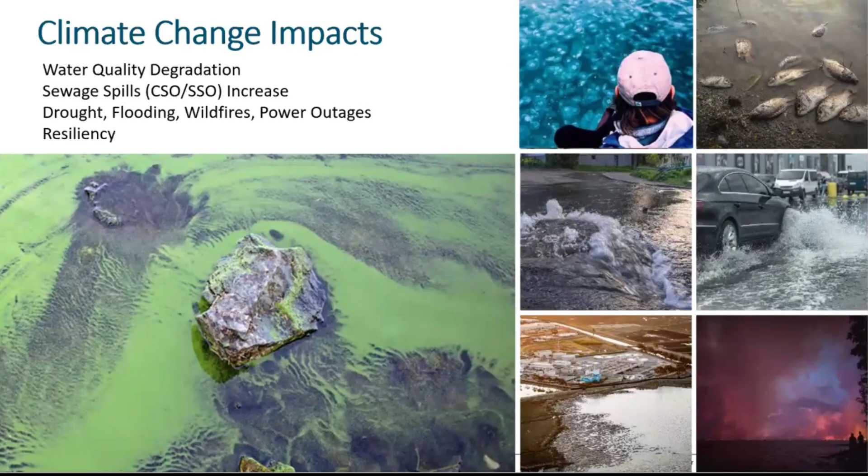And so when we think about how climate change impacts these 3Ps, we think about water temperature, algae blooms, hypoxia, kind of the technical aspects of how climate change impacts water quality for practices. For policies, we need to be mindful of balancing regulations. So CSOs, combined sewers have a harder time with higher flow treating, efficiently removing nutrient loads from wastewater. So balancing those 2 regulatory drivers.

And then thinking about advanced treatment versus greenhouse gases. So wastewater treatment plants themselves are significant producers of greenhouse gases. And as you increase the stringency of nutrient removal requirements, you're also increasing the greenhouse gases that they're producing. And so we need to consider that when really cranking down limits on wastewater treatment plants. And then finally, partnerships. So looking for cross-discipline coordination and collaboration to inform how climate change impacts nutrient management on watersheds.

We also recognize that environmental justice is an overarching challenge for the 3Ps as well. So when it comes to practices, degraded water quality typically impacts disadvantaged communities. And so we need to think about that as we're managing nutrients. Also, affordability is a big issue, right? So a lot of municipalities that have impacts on water quality can be disadvantaged communities. And so upgrading their wastewater treatment plant, putting that cost burden back on that community, we need to be mindful of that. Policies. When it comes to policies, thinking about affordability as well. And then partnerships, really focusing on community engagement and maybe aggregated funding as well.

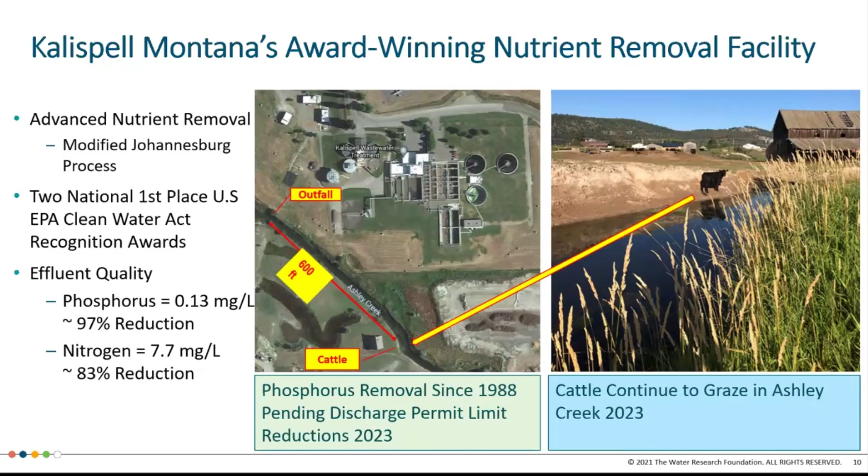And when we think about policies that drive this, we really want to think about improved nutrient permitting, nutrient reduction incentives, and pay for performance nutrient reductions. These are things, along with adaptive management, that facilitate nutrient removal in a cost efficient and sensible way, right? And then integrated planning, I want to touch on that real quick before I move on. Integrated planning is another important one too, because that speaks to how to balance competing interests with limited resources. So with integrated planning, a municipality is able to come up with a plan to prioritize what capital projects should be, the order of capital projects, and then identify funding sources to address several issues in a sustainable way.

So when we talk about partnerships, we really want to think about how do we strengthen partnerships. And in order to do this, we identified barriers to effective partnerships and then key success factors for successful partnerships, right? So if we think about barriers, you're talking about undefined roles and responsibilities. I know I'm going to get to this in a little bit. I was really involved in the Delaware Estuary Water Quality Improvement Partnership, or DEWQIP, because every project or partnership needs a really good acronym to go with it, so it's key. And there we struggled with this in our first year because we were trying to put out messages to the community, but the roles weren't well defined. So it was hard to put out a press release that said DEWQIP on the bottom, because what is DEWQIP, right? So that kind of definition is really important.

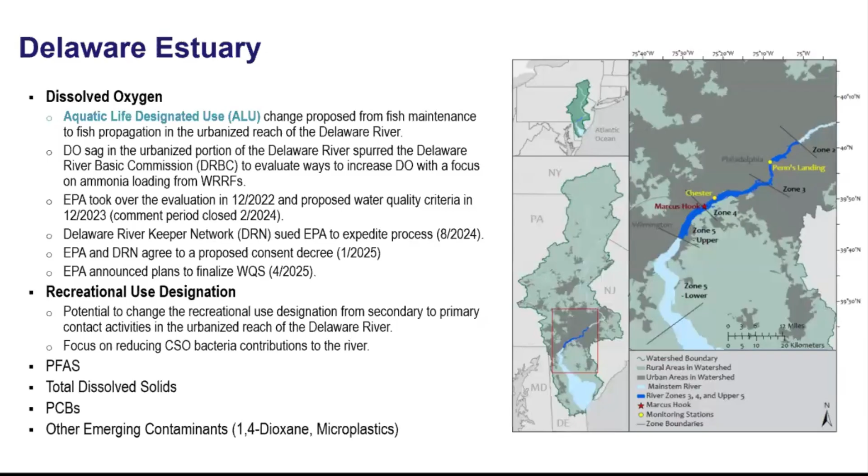There's a whole regulatory history that goes back to 2017, where DRBC started to study how to address this issue. They were going through this study, zeroing in on updated DO criteria, and one of the stakeholders in the area, the Delaware River Keeper Network, petitioned the EPA to step in and hurry the process along. The EPA did so, and then they actually were taking too long for the river keepers' liking as well. So I think they sued them as well. So kind of a little bit of a regulatory mess with some key stakeholders in the area. But what it's led to is now they have finalized the DO criteria and are moving into implementation planning with the Delaware River Basin Commission.

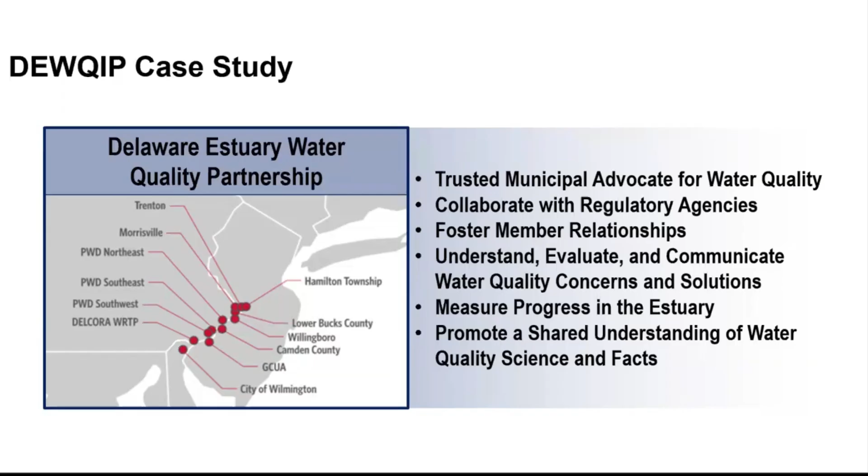The DEWQIP, or the Delaware Estuary Water Quality Improvement Partnership, was formed in, I believe it was 2021, and is a group of 12 dischargers, or nine that are active, sorry. It's 12 facilities, but PWD has 3 of those. And these are their stated goals, really. They want to be the trusted municipal advocate for water quality in the region. They want to collaborate with regulatory agencies, foster member relationships, understand, evaluate and communicate the water quality concerns, measure progress in the estuary, and promote a shared understanding of water quality science and facts. So that last one is a big key. There's a lot of discussion and disagreement about some of the science and facts that are driving this regulatory activity in the region.

Policies, there has been a long history of improved DO in the Delaware Estuary. And so that's a positive. A negative is EPA stepping in to speed things up and interrupting that DRBC transparent process that was going on. And then partnerships, again, long history of partnerships in the region; there's a PCB coalition, and before DEWQIP, there was a DO partnership with several utilities. DEWQIP formed with 9 active utilities to share information and resources, still getting their feet under them at this point. And then a plus minus here, DRBC's water quality advisory committee meetings were included in the initial effort to update the DO criteria standard. However, that process was interrupted and they haven't been having those meetings as regularly anymore. So they've kind of cut out the stakeholders a little bit.

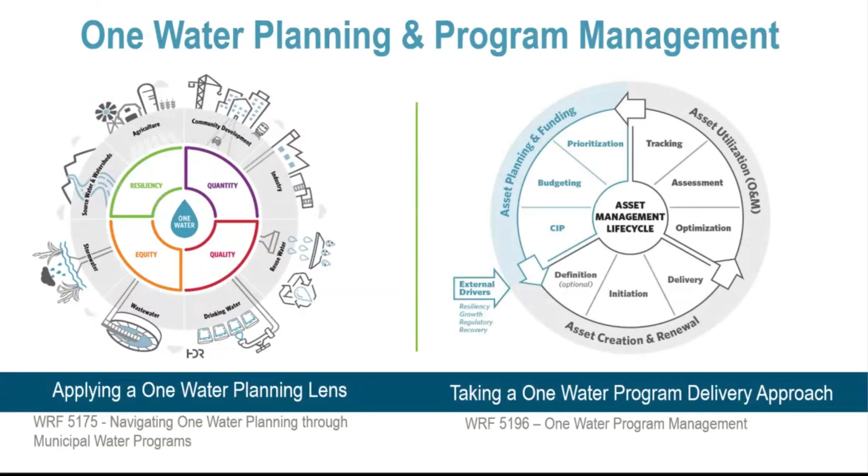This is my last slide. Just a plug that we're also doing a similar project, thinking about these 3 Ps and a framework for One Water planning and program management, and that's WRF 5175, and then also WRF 5196.

And with that, I'll take questions. I did it on time. Okay. Answered all the questions. If you think of questions later, you can go look at the report and Control F your question. The long report.

Yeah. So, in practice, most of the talk was on ammonia removal. Is there any consideration of ammonia recovery? Perhaps, but I heard there are a couple of research efforts now that focus on ammonia recovery and then recover ammonium sulfate as fertilizer. Perhaps that could offset some of the costs. Cost is usually one of those considerations. So is recovery part of the talk, or is the focus just removal? Repeat the question.

Yes. Sorry. So if I understand the question correctly, you're saying, for practices, do we consider things outside of mainstream treatment like ammonia and phosphorus recovery and side stream? Is that correct? Yeah, it's a really good point. And yes, that is part of the larger project and practices. I know there's been a lot of facilities going to ammonia and phosphorus capture. I know some facilities are having an issue finding markets for the phosphorus that they recover, which is kind of unfortunate. But hopefully that market materializes a little bit more in the future.

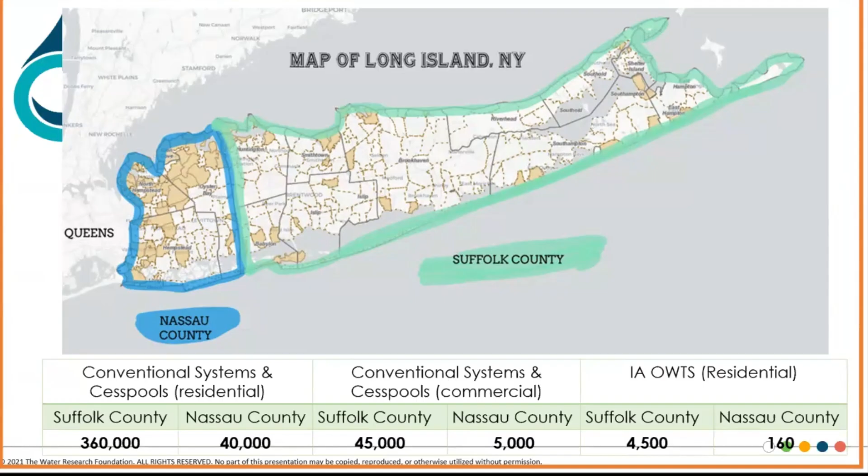40,000 septic systems in Nassau County. Nassau County is mostly sewer. However, the North Shore, contributing to Long Island Sound in Nassau County, has 40,000 septic systems. So the 10% that's unsewered is 90% unsewered. So just some numbers for you. Commercial systems, there's 40,000, 45,000 in Suffolk County. So that throws the whole number in Suffolk County over 400,000. Figure another 5,000 in Nassau County. So we're talking 450, maybe 500,000 systems that had no wastewater treatment for decades.

Throw on top of that, most people, when you think of a septic system, it's a septic tank. Most people don't think about septic systems, but I'm in a room of environmentalists, so hopefully some of you do. Septic tank, then some sort of leaching structure, typically a leaching field, right? It's a field. You're not just dumping water into the ground, except for on Long Island. They have permission from the state way back when to have these deep leaching structures, minimum of 12 foot. So these are concrete rings. They're 8 foot in diameter, 4 feet deep. They stack them on top of each other. You need 12 feet.

Historically, raw sewage goes in there and the water builds up. And what happens when you get a lot of pressure of 8 foot diameter of 12 foot of wastewater? That weight of the water, it becomes like a needle. You're creating injection wells of, I'll be nice, wastewater into the ground, into the sand, into your aquifer, your sole source aquifer, your drinking water, right? So now the cost of contaminating the water, you now have to treat it, and you're running into problems.

And guess what? There's stuff in our wastewater that we can't treat really easily. There's stuff that we didn't have in the last 10 years. There's stuff we can measure now that we didn't have the ability to cheaply measure 10 years ago. And that's probably some of the conversations going on in the other group over there. So, with PFAS and all of those other contaminants, there's pharmaceuticals. We're just measuring pharmaceuticals now.

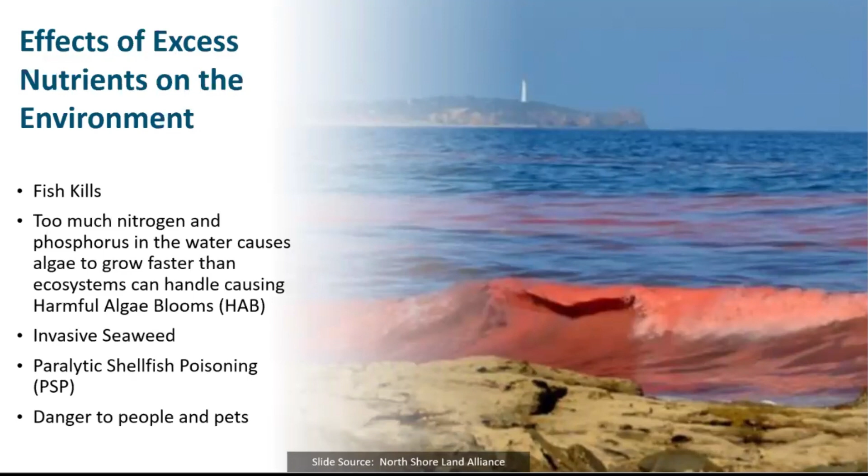If you remember a few years ago, a dog died drinking water in Central Park from a blue-green algal bloom. That got a ton of press. On Long Island, a lot of you have brown tide on the South Shore. It looks like you're fishing in a bay of coffee, right? What really gets noticed in the press is when they have the turtle die off or fish kills. But fishing in brown water, it's disgusting. You'd think people would act. And we did eventually.

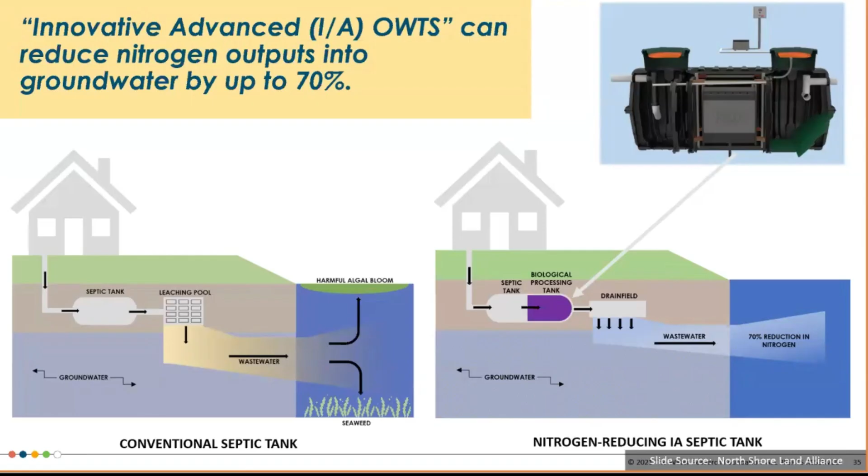So you're adding nitrogen into your sole source aquifer, increasing nitrogen in your drinking water, on top of all the nitrogen in the wastewater making its way out to your bays and surface water. So there are many environmental issues here. Over the last 10 years, we've taken a 5-pronged approach. This was set into motion when the county executive at the time assembled a team for what they called their magical septic tour. They went to 5 states in 4 days, Massachusetts, Rhode Island, Delaware, Maryland, somewhere else, and came up with a lot of recommendations.

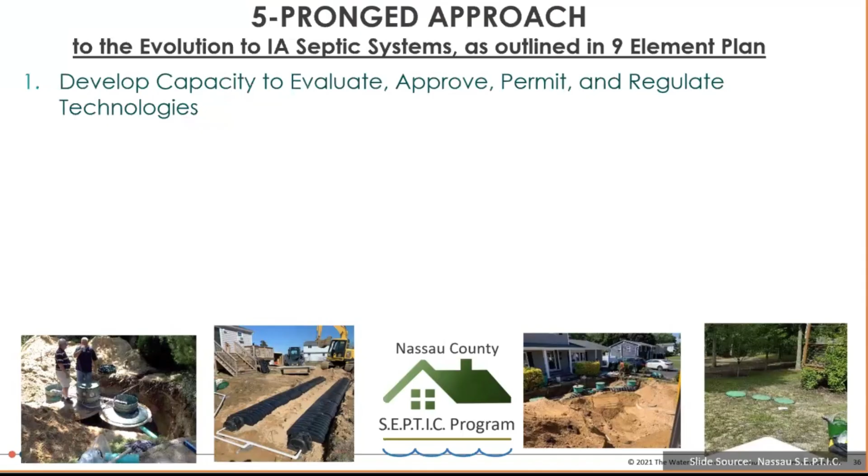They wanted to improve on what other areas that have tackled this problem have done, and how we can make it better. So we need to develop the capacity to evaluate, approve, and regulate these technologies. This is a foreign technology for the regulators, so you had to address that. Then you had to train everybody: the industry, the public, public outreach. You have to train the regulators who will be evaluating these plans. They don't know what they're looking at.

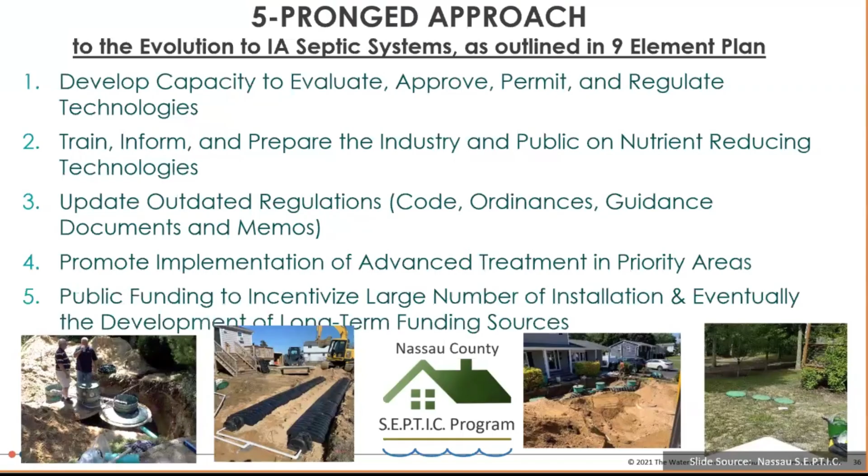So just taking a quick look, regulatory jurisdiction in New York for advanced treatment. So if you have advanced treatment systems, New York State likes to see you have a program that obviously defines your goals and responsibilities, but really addresses these systems as a don't just bury and forget about, right? You need to maintain them. They need active maintenance contracts. They need some sort of responsible management entity or RME.

So Suffolk County and Nassau County are acting as the responsible management entity. It allows them to require maintenance contracts. They added clauses in there that have renewals and reporting, and to make sure the systems are working, they put all that stuff in place. But really, Suffolk County is easier. The county has the full

jurisdiction of overall permits, whereas in Nassau County the Department of Health only has jurisdiction over new developments or subdivisions of 5 lots or more. Everything else goes to the individual towns and villages. There are 40 individual towns and villages. So each town and village could have their own set of regulations and rules. How do you make something happen?

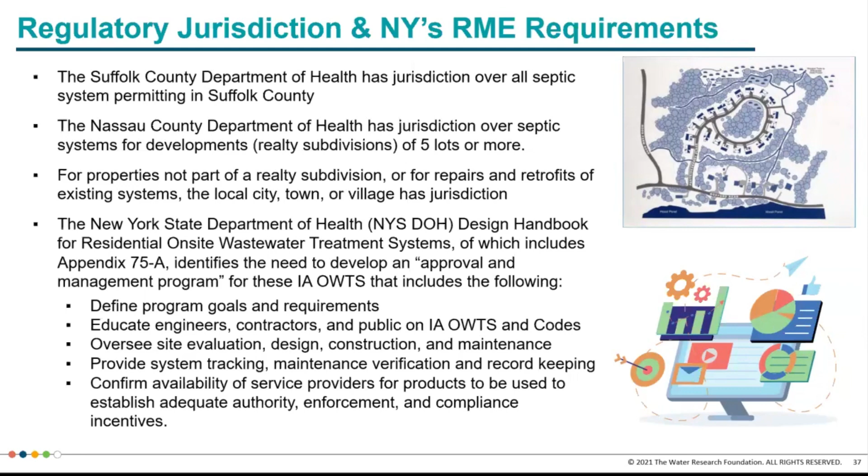Well, we teamed up with the Soil and Water Conservation District, similar to other areas and what you'll hear about next. And working with them, they acted as the RME on behalf of the county. And they gave general guidelines. Towns could do what they want with it, but guess what? The DEC gave them money, the county gave them money, they're giving homeowners money to put in the systems, and it worked.

So looking at, there's various technologies. When we started this system, we wanted to look at all the various technologies. We looked at 16 different technologies, 6 made it. 6 were actually performing to the level of nitrogen that we needed, which is 19 milligrams per liter, is what we need to meet the nitrogen reduction goals.

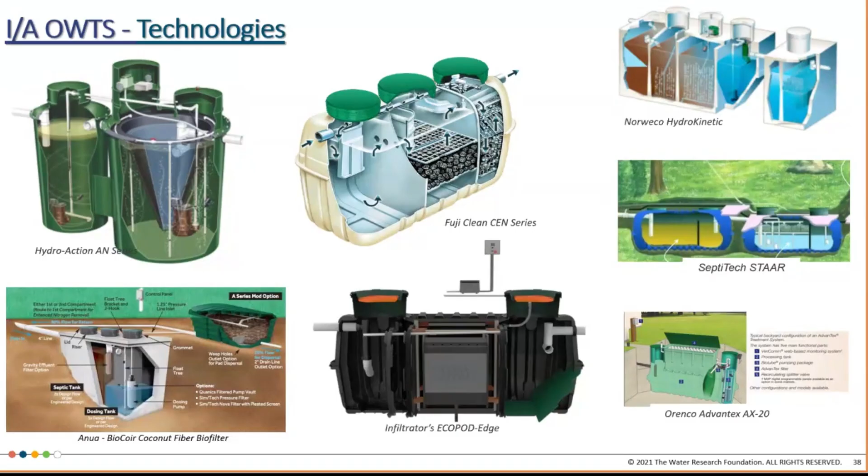The county set out and said, we want to see these in a lifetime. We want to see measurable goals, measurable reductions in our lifetime. So 20 years, we need to see something. In order to do that, we need to treat to at least 19 milligrams per liter, which is approximately a 70% reduction in total nitrogen from conventional wastewater systems. So here's a snapshot of some of the technologies. I'm not going to bore you with this. As you can probably tell, I could talk for like days on each of these technologies.

All right, so another prong in that 5-pronged approach. You got to get the word out there. You have to talk to homeowners. You have to talk to the industry, have training. We implemented continuing education for the service providers, a lot of public education sessions. And again, thanks to TNC, North Shore Land Alliance, we have maps on where the priority areas are. If you were to focus in those areas, you can measure the impact.

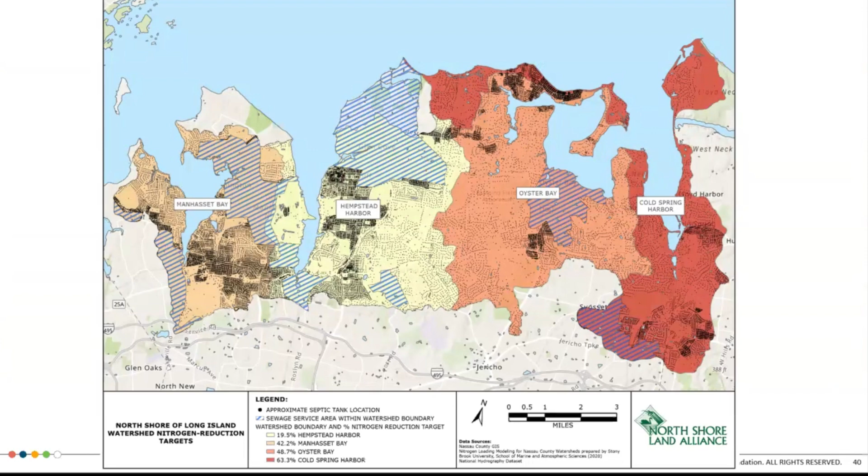So a lot of these, it shows that in the dark red 60% of the nitrogen concentration is due to septic systems. So again, I have a slide here that just reiterates the previous slide, but all of the plans that were put into effect can be leveraged. They're all consistent with the 9 elements plan, EPA's 9 elements plan. A lot of counties are working on that. They're also consistent with the Long Island Nitrogen Action Plan, which is now the Long Island Watershed Program. So by having all of these, you can leverage.

So Nassau County in general has $14 million of the required 40 million. They recently received another, I think, 5 million on top of that. Suffolk County has received over $100 million. So lots of money out there, and by having it in a plan and carrying out your plan, you can leverage federal and state funds. At an earlier discussion, I think it was in the first session, someone had mentioned they received $2 million, and that's great. It's a lot of money, but it's not a lot of money. They were able to leverage that $2 million into like $90 million. So if you can get the money going, you can leverage the money into other opportunities.

So again, there's a lot of money on Long Island and Suffolk County. Homeowners are getting up to $45,000 to replace their system. The money is not paid directly to the homeowner. The money is paid to the contractor on behalf of the homeowner. So there's this little loophole. There's also a political thing where the IRS was trying to tax the money, even though it was paid for, most of it, through sales tax revenue.

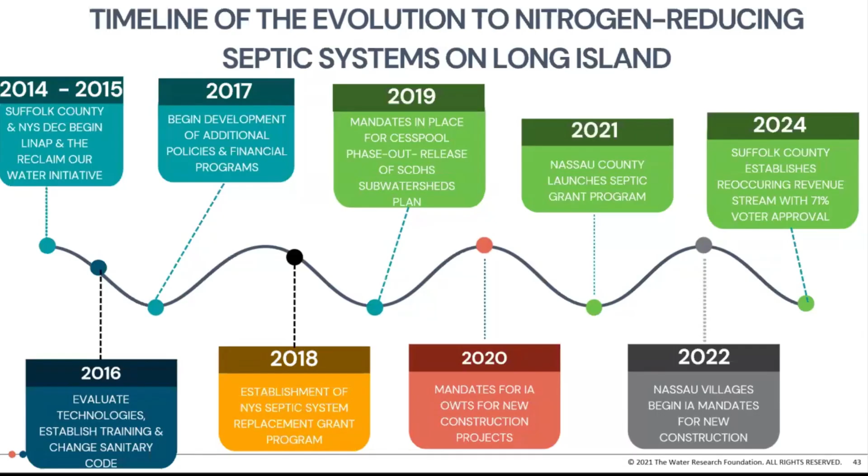It created almost $6 billion over this 20-year program, right? It's going to create $6 billion. They've already started to tap into that. They're increasing their grants by $5,000 each this year with that revenue. All right, and the systems work. Suffolk County has some of the most stringent standards at 19 milligrams per liter. They actually sample and monitor the systems, and they're all performing really, really well under that.

All right, so go through this fairly quickly here. But program success, without the county executive, you wouldn't have been able to do this. You need leadership from the top down, and you need significant county, state, and town investment, or at least time investment. If you don't have a leader who's really into this, you need a leader who can pretend he's really into this. You need to go into this with that aggressive goal that I mentioned earlier of we want to see results in our lifetime. Without an accelerated goal, you wouldn't get anywhere.

The other thing is the on-site wastewater industry for advanced treatment was kind of stagnant. It was fairly stale. I started working in this industry back in '99, and from '99 to 2017, there was not a ton of innovation. When this program started to kick off, we started to see international companies get involved. US companies making agreements, licensing technology, starting up R&D programs. And it really started to rejuvenate and reignite the industry. So I give the county a lot of credit for how they handled that.

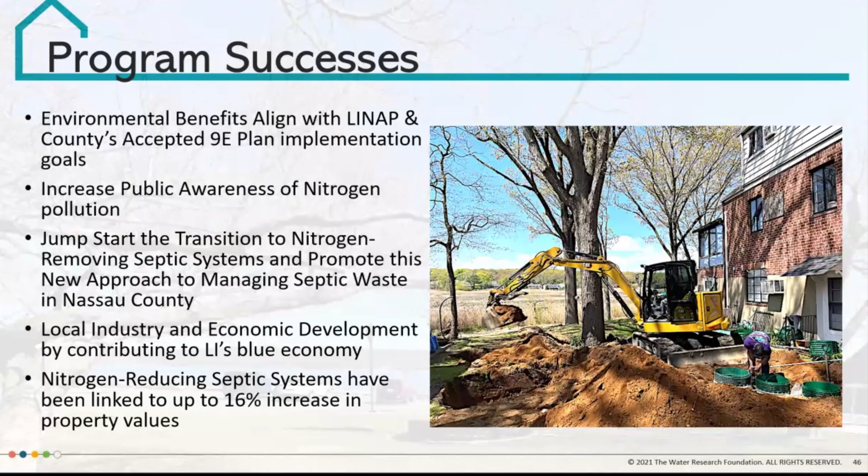So going through this, Suffolk County has to date probably around 3,000 systems installed from the latest numbers, 200 systems in Nassau County. And remember, Suffolk County has 300 and change thousand systems. Nassau County had 40,000 systems. So Suffolk's doing better. They have streamlined all their permitting. It's all cloud-based permitting, which makes it a lot easier.

It took out a lot of the issues of getting a permit. In the past, it would go on forever. You'd print paper copies, submit it, it could be reviewed. Now they can have 24-hour permitting in some cases using cloud. It cost $3 million, and it's probably one of the best things they did. So also construction changes, mandates for new construction. There's a lot of tangibles that came out of this project.

But struggles and lessons learned. A lot of counties don't have the funds that Suffolk County had to start. DEC created the state septic system replacement program. The first part of the program was 75 million statewide. Long Island got 70 million of that 75 million. So all you other counties here, which is everybody here, you get such a small amount of money, right? Long Island is the squeaky wheel. They complained, they made the noise and got the money. Not every county is going to have that. So that's where taking that $2 million and leveraging it to $90 million is going to be the most important thing.

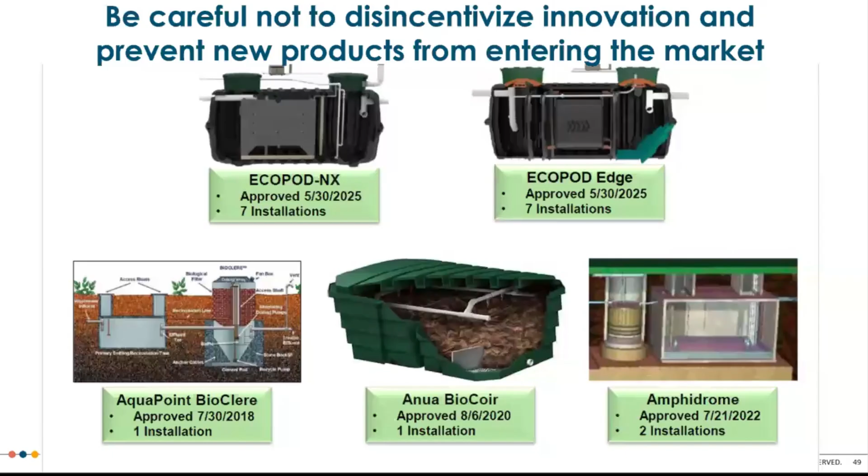Also, I already mentioned this, but you don't want to set such a process that cannot be flexible to allow new innovation into the marketplace. They did a great thing to let the best of the best into the market, but now the best of the best can't afford to get into the market. So that's counterintuitive.

So in Nassau County, they're just not equipped to run a grant program. I have that as a lesson learned because that didn't stop them. They worked with the Soil and Water Conservation District. Use a legally established entity under the county, or use your soil and water conservation districts, work with your local Nature Conservancy. Nature Conservancy was able to get a grant that helped with public education and outreach. Work with those groups. Multiple jurisdictions was a real pain, but again, using the Soil and Water Conservation District, we got through that.

It still allows deep leaching structures. I wish I could convince them to use leach fields. The problem is the lots are too small. There's really no room to do any of that. Again, you have lots that were supposed to be sewered that were never sewered. Sewering's not really feasible. They can only increase sewers by like 5 or 10%.

Again, in today's climate, you may not get a lot of things passed, but if you look at Suffolk County, they had the legislation changed in 2024. They had 71% support to do this. This is a bipartisan issue. I harp back to the first session today because I did surveys, and consistent across the board was recreational use of your waterways. Number one, nobody wants to hurt their tourism dollars.

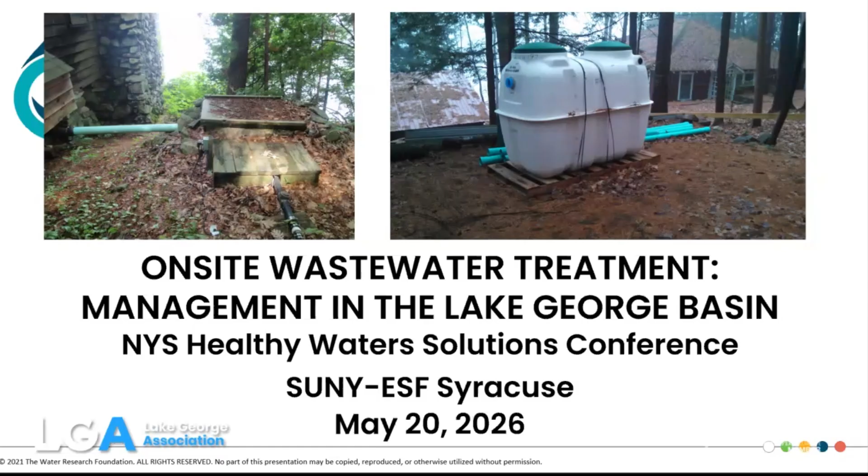Well, thank you. I'd like to thank Jake and Justin for providing some of the background that I'll touch on as well. I had a really nice title, The Long Road to Management. I forgot it, sorry, but all the pictures that you'll see are from Lake George and the situations that we're dealing with. So the agenda, I'll give you a little bit of background, talk about septic systems around Lake George, our studies and how we move that forward, show you a really neat website that we created, safesepticsystems.org, regulations, and then some takeaways.

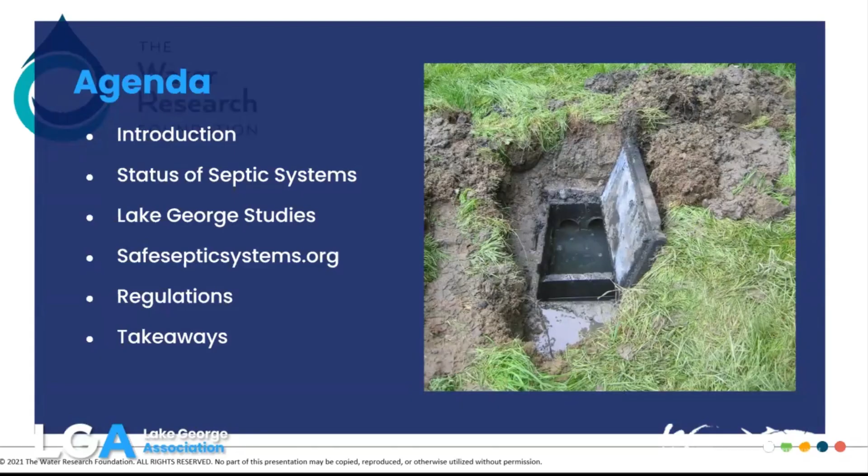So a little bit more background on me. I was here at ESF 42 years ago. Can you believe that? I worked in professional consulting for 17 years on wastewater treatment plants, stormwater management, worked with real estate developers, and I realized I didn't want to do that. I wanted to protect our resources, not destroy or alter them. Pete Seeger was a mentor of mine, and really helped me find the direction I wanted to go.

So as I say, I hopped from the dark side and worked to protect our waters, defend Lake George and its resources, work with the Lake George Association. It's the country's oldest lake association, 1885, actually, before the Adirondack Park was even initiated. And our mantra is we like to use science to solutions. We always start with the science, identify the problems, and move forward to resolve them.

So hopefully most of you know where Lake George is. It's about 3 hours northeast of here. Largest lake, and you heard Charlie Driscoll this morning talk about Adirondack Park, the largest park in the continental United States. Lake George, largest lake in the largest park. One of the reasons it's so special, it's also got a water quality classification standard of AA special. Its primary use is for contact recreation, swimming, drinking, culinary water. So really the protection of the water is very important to us. Water clarity of 40 feet.

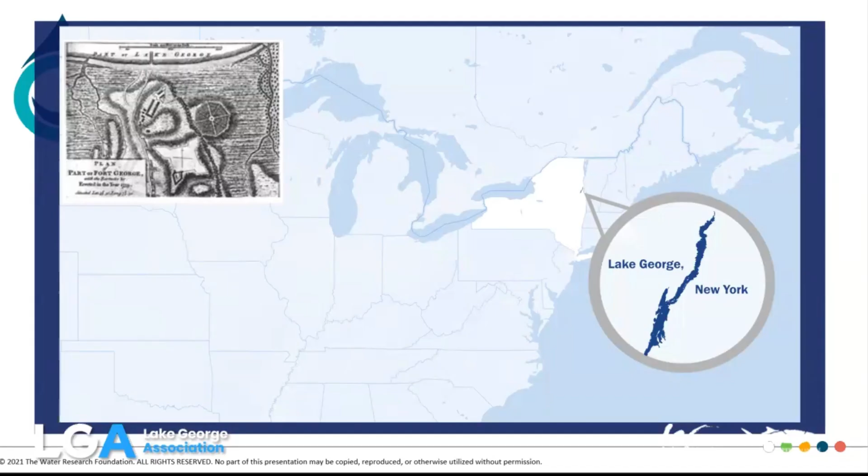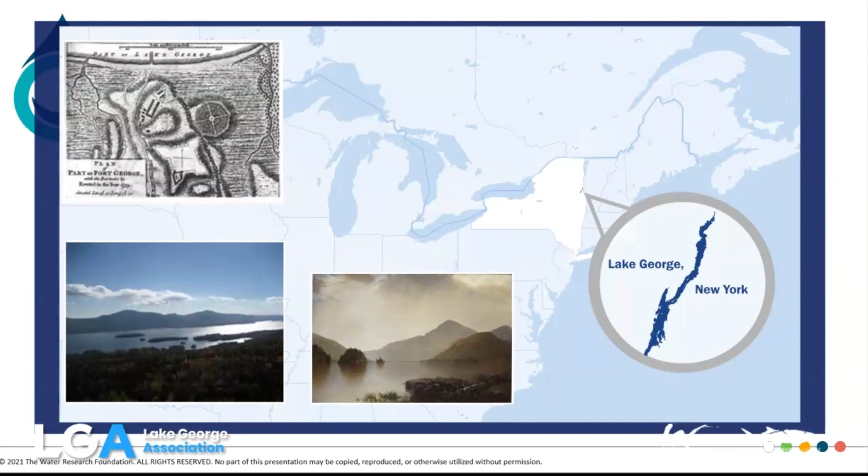1700s, the main battles of the French and Indian War and American Revolution were fought on Lake George. So historical importance. The 19th century, the landscape art schools, the beauty of Lake George. That's why people gravitated there. A lot of the paintings for Last of the Mohicans are from there. Then we move into 20th and 21st century tourism. We are home to a $2 billion tourist economy. The Sagamore Resort, out on an island on the lake. Hundreds of thousands of people come up to enjoy the lake. Businesses rely on the lake's water quality for their revenue. So everything is tied to the water quality.

And that's where we come in, to protect that water quality and make sure it stays as exceptional as it is. There's only 5 lakes in New York State that are AA special. So there's a reason to protect this, and that's why our organization focuses on it. We work on road salt, nutrient pollution, septic systems, stormwater, invasive species, climate change. But we're here for septic systems. So take a look at them in Lake George.

We don't have 500,000 systems. We have 6,000 within the Lake George Basin. We have 9 municipalities and 3 counties, and each of those approaches it a little differently. So that's where we start having problems. 45% of these systems are in what is legally called the critical environmental area, a legal term under DEC and SEQR, the State Environmental Quality Review Act. So within 500 feet of the shoreline of Lake George or 100 feet of tributary streams, we have 45% of those systems, and those are the ones that can have the greatest impact.

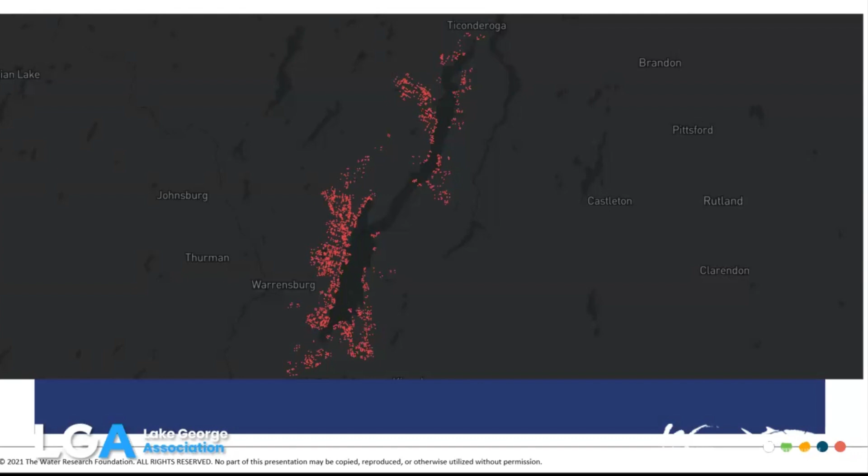The other thing we have is the smallest state agency in New York State. The Lake George Park Commission can oversee the protection of waters in the lake. And as I said, science. We are very fortunate. We have partners with Rensselaer Polytechnic Institute, the Darrin Freshwater Institute, that we've provided funding for and worked with since 1980, one of the largest data sets of any freshwater body in the country. This is some mapping of chlorophyll A, the microscopic algae that grows in the water and indicates the productiveness of a water body. Red is bad, green is good.

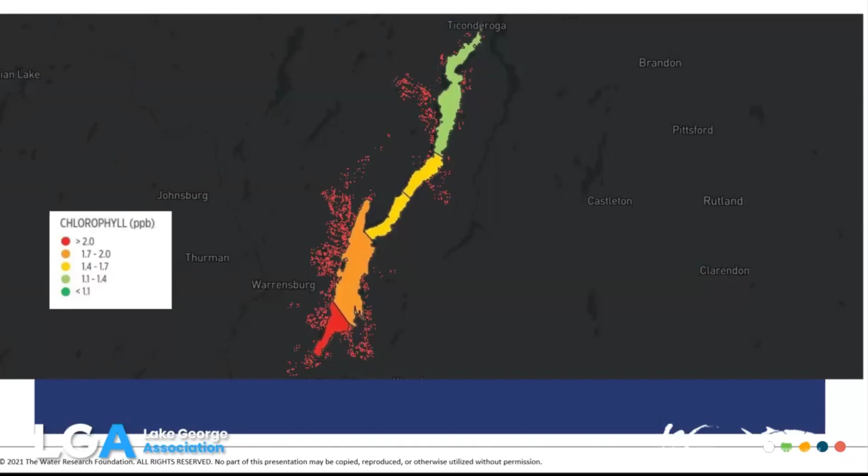So you can see where there are more septic systems, down in the south end of the lake, we have the higher productivity levels. That obviously is a concern, showing that we are having impacts and influence, and one of those was septic systems. Clearly, higher density of septic systems, greater impact. Again, letting the science lead the work. So we knew we had stuff to do, we knew we had studies to do. This has been studied for a long time, and you've heard that elsewhere.

1970s, 1980s, the environmental impact statement that was done for Lake George and the area. Now, the very southern part of our boundary is the southern part of the Great Lakes boundary, if you bring in Lake Champlain and the St. Lawrence Seaway. So we are the very southern part of the 10 states standards and the Great Lakes Basin.

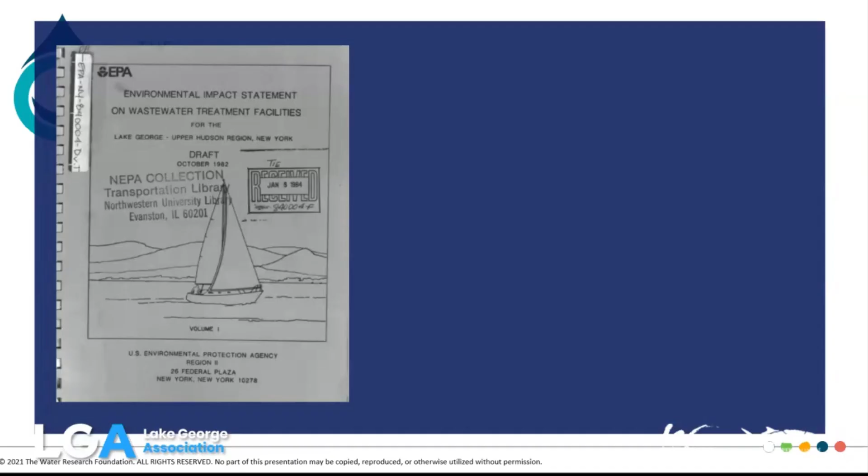So at one point they looked, well, we can just pipe everything down to Glens Falls. No, you can't, because you can't take water out of the Great Lakes Basin. So that was off. So then we wound up having to take a look at septic systems and municipal plants around the lake. There were a lot of studies by the Department of Health and the DEC on septic systems and their influence. Then there was a commission put together to form the Park Commission. Again, I talked about that.

So the plan for the future of Lake George, 1987, they came up with about 200 points to address invasive species, stormwater, recreation, and on wastewater, they said we should have a 5-year rotating inspection and management program that is set up to check all the septic systems in Lake George. So they moved forward in 1991. They actually enabled that law, adopted it.

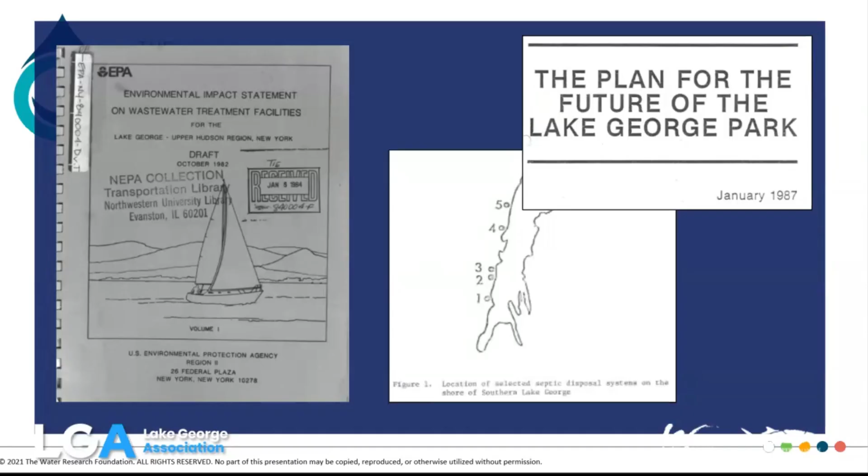1992, the lawsuit came by some of the residents who said it was overburdened and that they actually did not take a look at the no alternative method, which they needed to do under SEQR. So they threw those regulations out, and then everybody decided, well, we're not going to go there, and they let it go. So I wound up coming in 2002. We started seeing algae blooms coming around the lake. We knew there was a problem.

You heard Justin before talk about the impacts of septic systems, what they can do with algae blooms, lead to cyanobacteria blooms. So this is a problem, and we knew that's what we do as water keepers. You listen to your water body, you listen to what's going on, and you take a look and you try to address that. So with that, we started again going back and doing the science. We worked with a group in one of those southern bays where you saw those higher levels of chlorophyll A. And we just started taking a look at what was actually permitted in that bay.

Worked with residents, went to the town hall, pulled the permits and files, and in this small bay, Dunham's Bay, about 80 residents in the bay, we found out that there were 21 systems of all those systems there that were permitted. 14 were marginal, meaning they had a napkin in their town file and they circled where a septic system may be. 2/3 of them undocumented. Nobody had an idea what was there. So clearly that is a problem. The town board recognized that and they needed to act on that. And we'll touch on that in a little bit.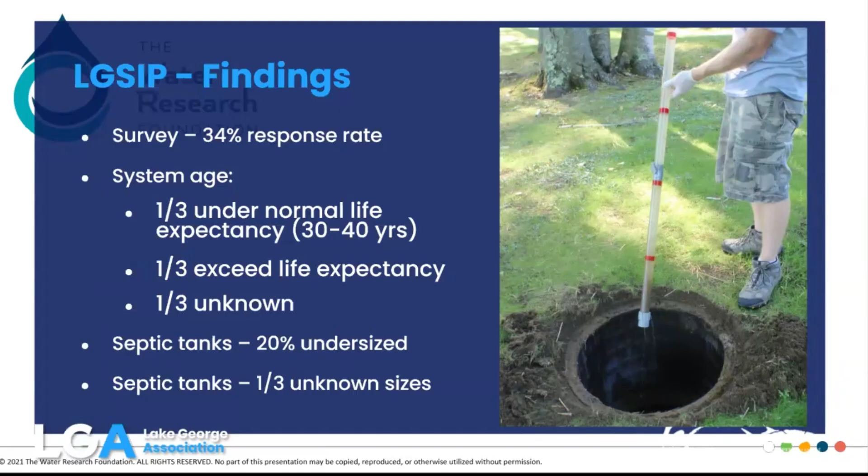obviously is scary. Septic tanks are sized based on the number of bedrooms. 3 bedrooms, you have a 1,000-gallon tank. 4 bedrooms, 1,250, and so on. 20% of those tanks were undersized, so you're getting a reduced level of treatment. A third of the systems, nobody had an idea, which is an indicator of a problem because that means they're not pumping them. You should maintain your system every 3 years, so that's a problem.

I'll never forget one quick story. This woman called me and she goes, Chris, I don't need to pump my tank. I've never had a problem. I've been here 50 years. And I said, well, you're probably the first person that I would go to look for a problem, because you haven't maintained your system.

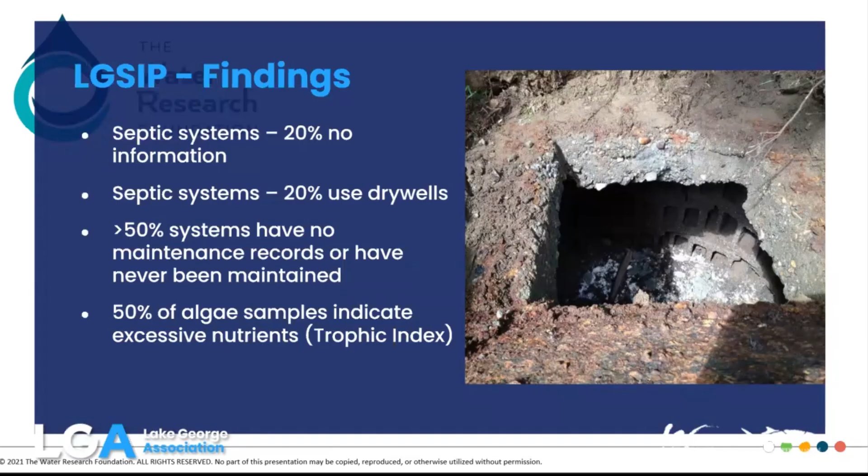You saw Justin talk about cesspools. Here's a shot of one. 20%, no information provided at all. Use of dry wells, we heard about that. And then we also started doing algae monitoring around there, and we were seeing high indicators of nutrient trophic levels. So these were all indicators and justifications for a management system.

So what were we going to do with all this data? We figured that we would create a prioritization algorithm. We took 3 layers of GIS information. So site suitability, what works for a septic system? You need to have separation of groundwater and bedrock. You need good soils, the hydraulic conductivity, how quick the water goes through the soils, separations to your surface waters. The slopes: the steeper the slope, the less treatment that you will have, the quicker the water will go through. So we created a rating system, worked with some professional engineers, and we graded that.

So red is bad, green tends to be good. You could see where you've got soils that are not as good for septic systems, where there might be shallow depth of bedrock. These areas started popping up. Again, you're within that 100-foot separation, so we're in areas of concern for prioritization. Then we evaluated all those systems and created a rating system on management, on the age of the system, on the components, whether they were sized properly, whether they had permits.

And then we did algae monitoring along the shoreline. Where were those algae blooms? What were the levels of the trophic index? Were there indicators of high nutrients? And we overlaid that, and you can see now areas where homes and systems popped up. You can see how they related to areas where there were algae blooms: the crosshatch in red, higher trophic numbers; where it was just the diagonal, it wasn't as high; where it was orange, it was a lower level. So these started pointing out areas of prioritization.

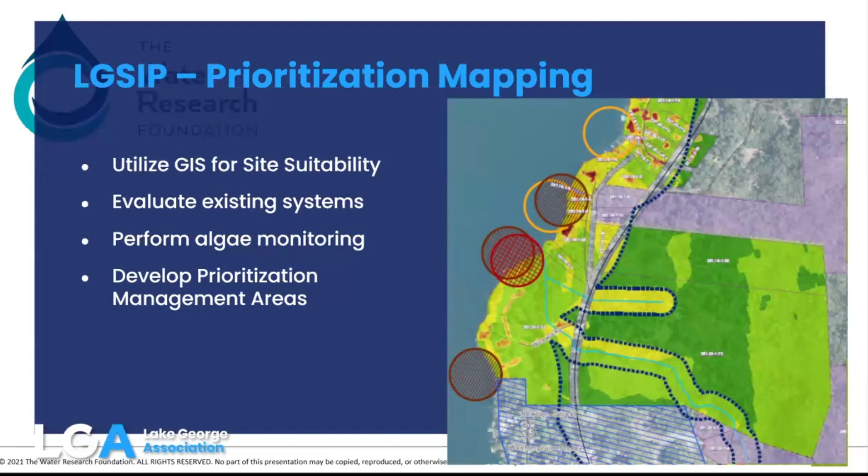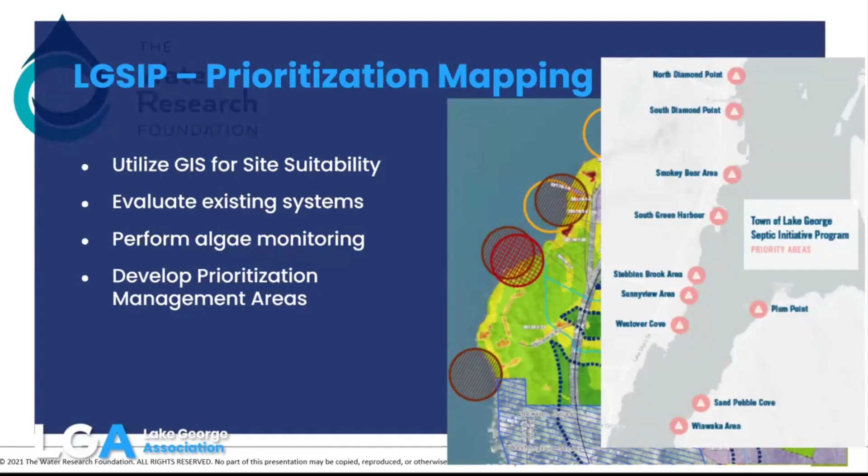So we were able to produce a map to show the town, I'm sorry, there we go, of areas in the town where there were high indicators that management was needed and that you should implement that program. Getting back, we talked about Dunham's Bay earlier. We worked with the town of Queensbury, took that biomonitoring data and set up a wastewater management district. We've heard of sewer districts where you go to centralized sewers. Well, this is decentralized, a lot of what Justin just had.

My time's up? Shucks.

So we established this. For those homes in that district, our organization provided matching grant funds to help these homeowners replace their systems. 33% of the systems in that bay, remember there were about 80 of them, were upgraded, many to those tertiary or enhanced treatment units that we saw in Justin's presentation. This is a Fuji that's going in. It's like a mini treatment plant where you'll have settling, anoxic conditions where you can treat the nitrates, and then clarification and aeration to treat the BODs and others. So really, mini package plants, really good.

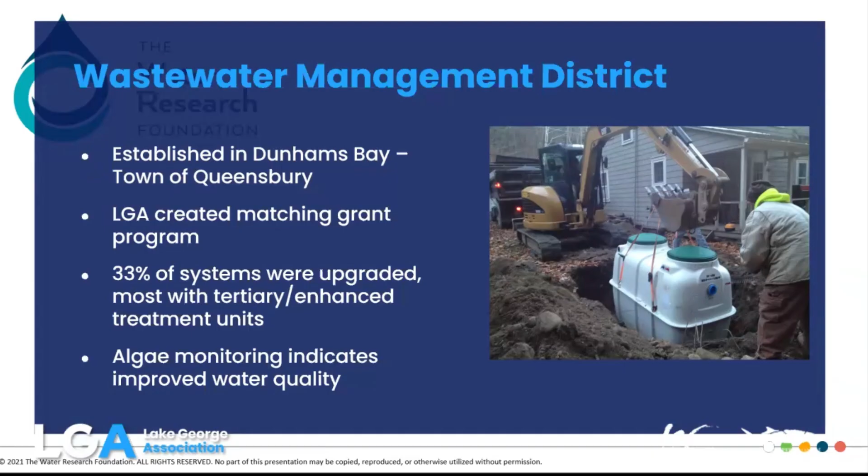And then we started doing some of our algae biomonitoring in the area. So this is a little snapshot of what we found. Systems pre-2000, their parcels are in red. Systems that were changed after the 2015 management district went in are in green. The blue check marks are where we saw a reduction in what we call the algae of concern, these indicators of trophic index, and the red exclamation point where we saw the trends going the other way. So here we were seeing decreases in the algae of concern where new systems were being put in.

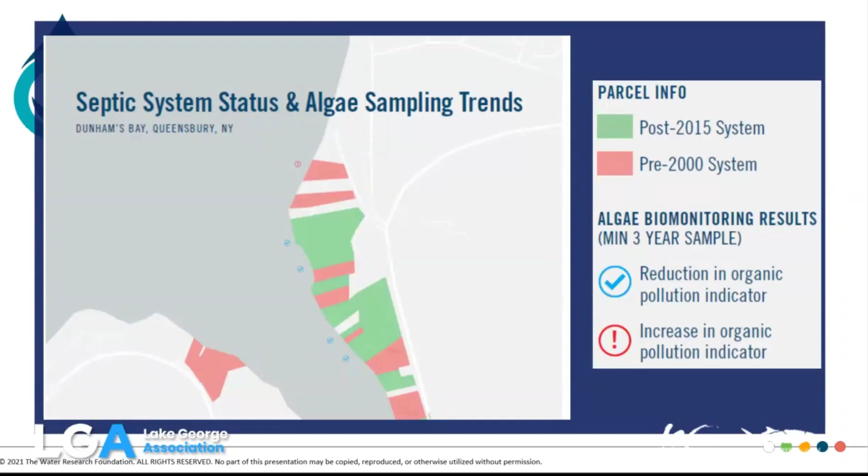We created a website, Too Precious to Waste, from fixing the financing. Again, go to that website.

I'm not sure if I can get there here. I'm almost afraid to try. They said I could, but we better not try. But go.

It's safesepticsystems.org. We actually created a guide to walk people through how a system works, what they need to inspect when they go through it, how to consult an engineer, the do's and don'ts that should go into a system. One of the cooler things is we worked with a couple local lending institutions, banks, and actually got low and no interest loans for people to upgrade their systems. So please check that out.

We also started working on regulations, property transfers. The town of Queensbury again. And this is a thing, you know, I was a professional engineer in the state for years in consulting. You do home inspections, you check everything but the septic system. They're more worried about radon, and not trying to minimize those impacts, but they don't check your septic system. So towns, when properties were being transferred, needed to check those.

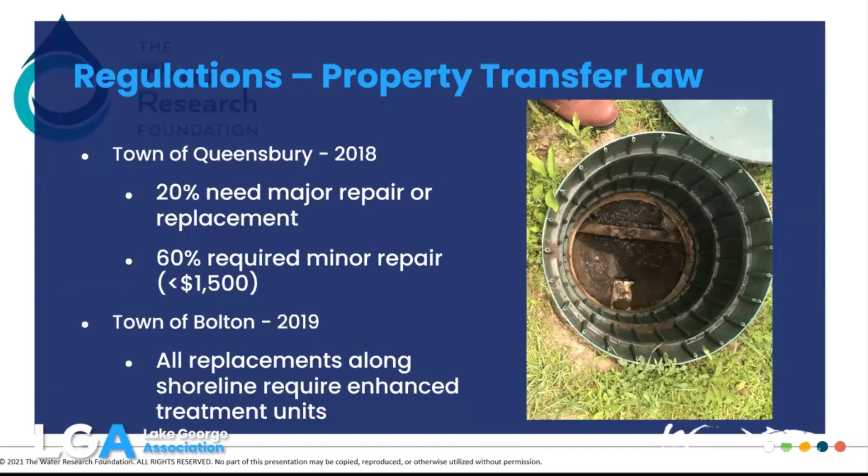All this work that we did with the municipalities, we were putting pressure the whole time on the Lake George Park Commission, because again, 9 towns, we had to go to 9 different towns to get this done, or we could go to one state agency and say, this is what you should do. That's what we started doing. Again, the lack of uniform standards, water quality protection. So they put together regulations in 2022, and they went into effect in 2023.

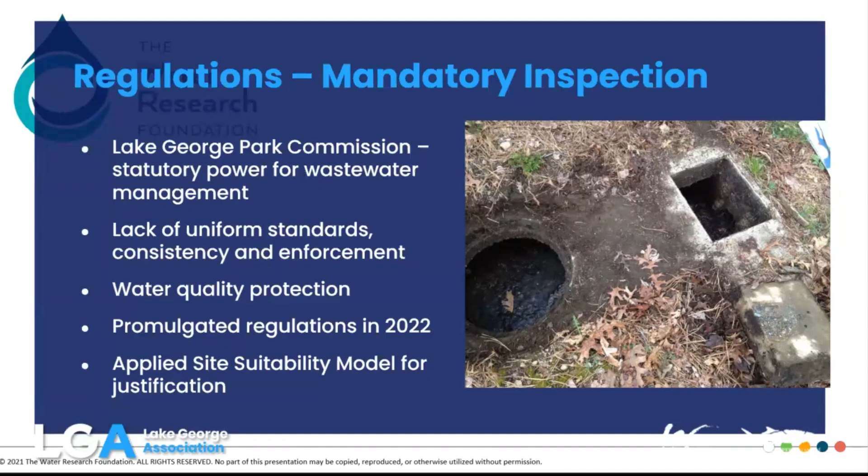They actually used our site suitability model to show that 80% of the systems within that critical environmental area around the lake were bound to cause some problems due to separation of groundwater or bedrock or setbacks. So we were very pleased that that went through. All properties now within 500 feet of the lakeshore, 100 feet of streams, are in a 5-year rotation for being inspected. So every 5 years, they're going to visit your home and inspect the system. That's approximately 2,500 systems, 500 a year.

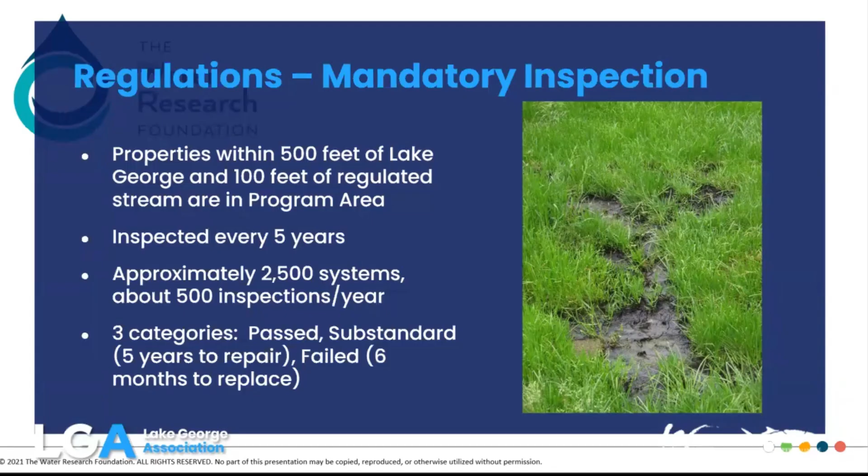And they put 3 categories. You pass, you're substandard, meaning you have to increase your septic tank size or you've got a pipe or something that needs replaced, or you're flat out failing, and then you have 6 months to repair. If you're substandard, you'll have that 5-year period to replace it before the next inspection. So what are the numbers? About 40% have passed, about 22%, again that range, 20 to 25%, failing. And then the remainder are substandard systems that need small or minor upgrades. So we're 3 years into the program, and that's where we are.

So in closing, it does take time. I always say you have to be consistent and persistent. From 1987 to 2010, we established the need, the studies, monitoring, algae biomonitoring. 2012 to 15, working with Dunham's Bay, the systems study, we got in the wastewater management district. The town of Lake George study, 16 to 18. Property transfer laws, towns start realizing what they need to do. 19 to 20, the education and outreach, our safesepticsystems.org. We were doing public meetings in every town across the lake to show them what the website could do, how they could help themselves. And then the Park Commission putting in the inspection law in 22.

So some other takeaways: multifaceted approach. You need science, you need research, partner with the engineers, policy. You need to make friends with your elected officials. The failed septic systems were justified. I remember saying 20 years ago, 25 to 30% of these systems are failing. And they're like, no way, Chris, there's no way that's happening. Well, we're validated. And maintenance and inspection are key. If you have a septic system, pump it out every 3 years. You're going to find out 90% about your system, if it's working or if you've got problems. And I always have to say, I didn't say this earlier.

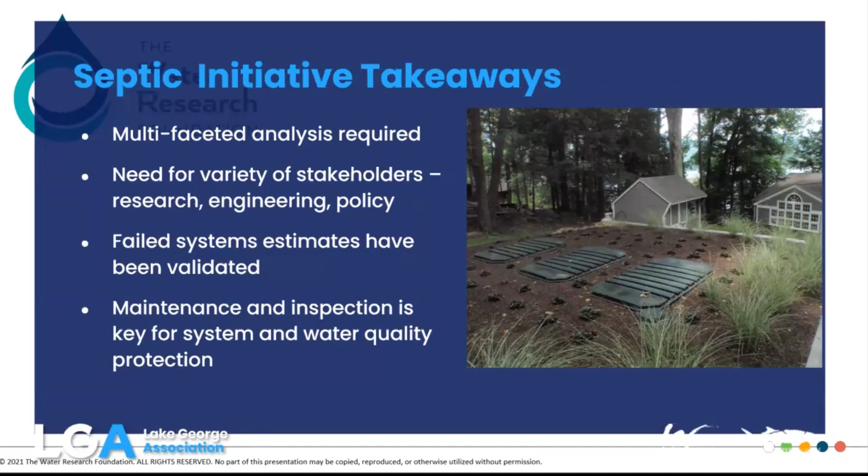Well, RID-X says that it will dissolve all the solids out of your septic tank, all the sludge and solids. Well, what it does, it's an enzyme, and it really kind of floats them, and they leave your tank and go out into your absorption field, and they'll wind up clogging your absorption field. So they do remove the solids from the tank, but not how you want.

I'm afraid of this one. Go ahead, AJ.

Well, there's a state septic replacement program. Since the program started statewide, Long Island has gotten funds. The counties around Lake George were successful as well. And I think we have about 56 counties statewide that are participating, but a lot of counties are not as efficient at spending that money because the programs aren't as robust as what you see in Long Island and a few others. From your perspective, what would you suggest as the first place for a county? Here's what you gotta do to really get started.